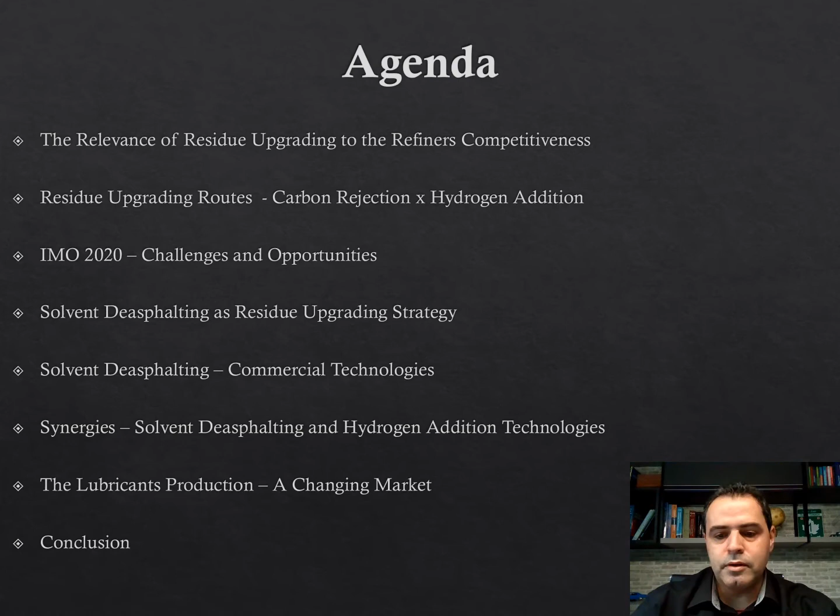The current scenario reveals the relevance of residue upgrading to refiners' competitiveness because we have stricter environmental regulations, a growing demand by petrochemicals, and falling demand by transportation fuels. These scenarios create the necessity of higher bottom of the barrel conversion capacity for refining hardware.

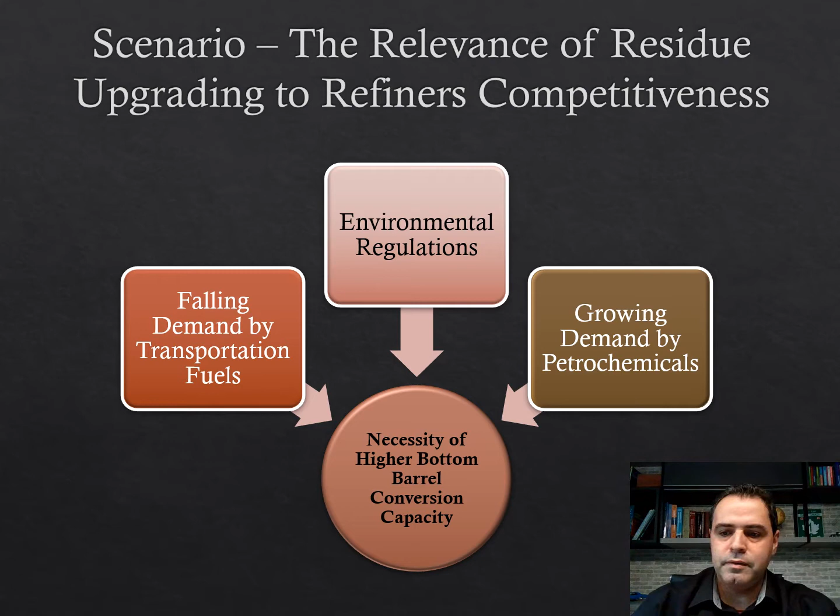For example, the growth of electric vehicles: according to IEA 2020, it's possible to see that the number of electric vehicles in circulation grew higher than 7 times in a 4 year interval. This is a strong contributor to the reduction of transportation fuels consumption.

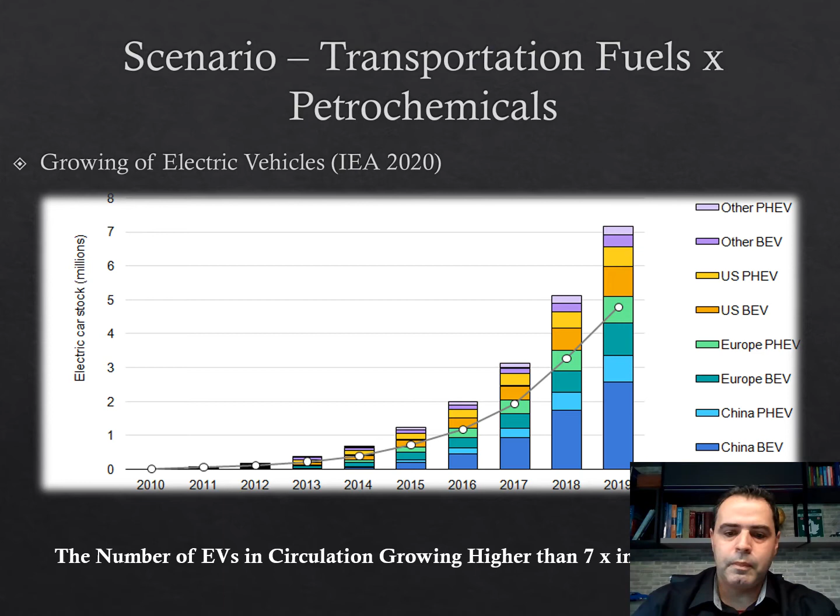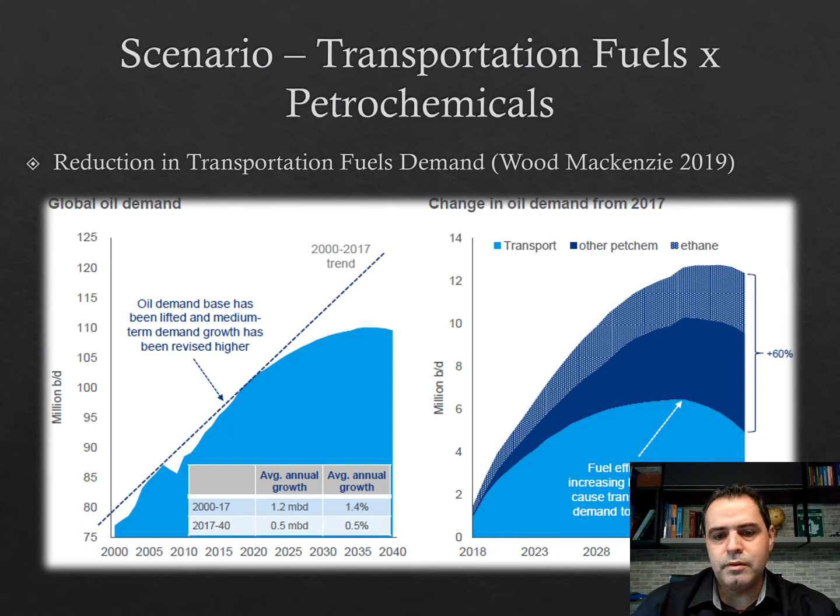Under this scenario, the reduction in transportation fuels demand, according to Wood Mackenzie in 2019, is expected alongside growing demand by petrochemicals, which will let petrochemicals account for the major part of crude oil consumption in the middle term.

Again, according to data from Deloitte, the growing market of petrochemical intermediates - ethylene, propylene, benzene, and paraxylene - means more petrochemicals implies higher bottom of the barrel conversion capacity.

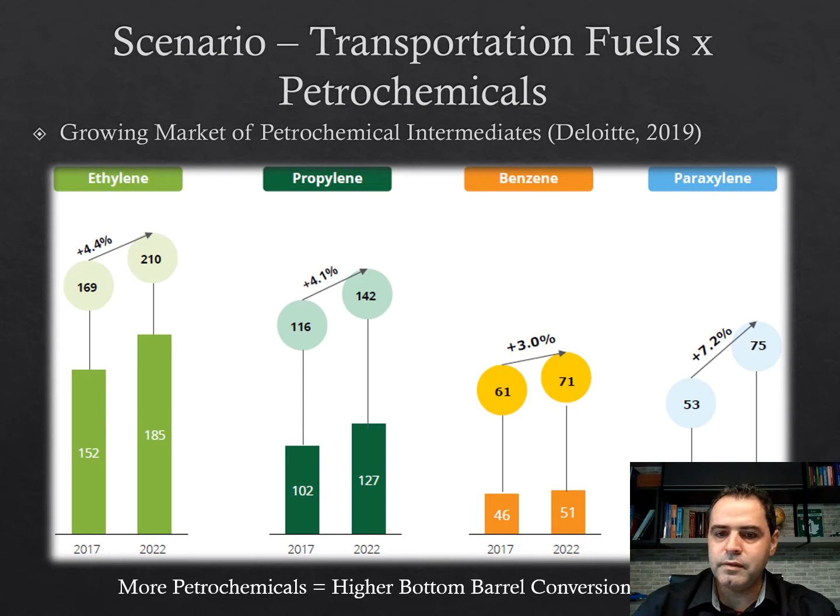The residue upgrading routes available are carbon rejection versus hydrogen addition. Carbon rejection normally involves thermal cracking processes, and we have catalytic cracking, FCC as a catalytic process, and solvent deasphalting. There's a necessity of post-treating units, normally hydro-treating units, to attend current environmental regulations. We have in the carbon rejection alternatives lower yields of high quality products depending on the crude, but lower operating and capital costs.

For the other side, hydrogen addition includes deep hydrotreating units and hydrocracking technologies. They present higher yields of high quality derivatives, but unfortunately high capital costs and high operating costs. On the other hand, these technologies are able to process high contaminant feeds, even for heavy crudes.

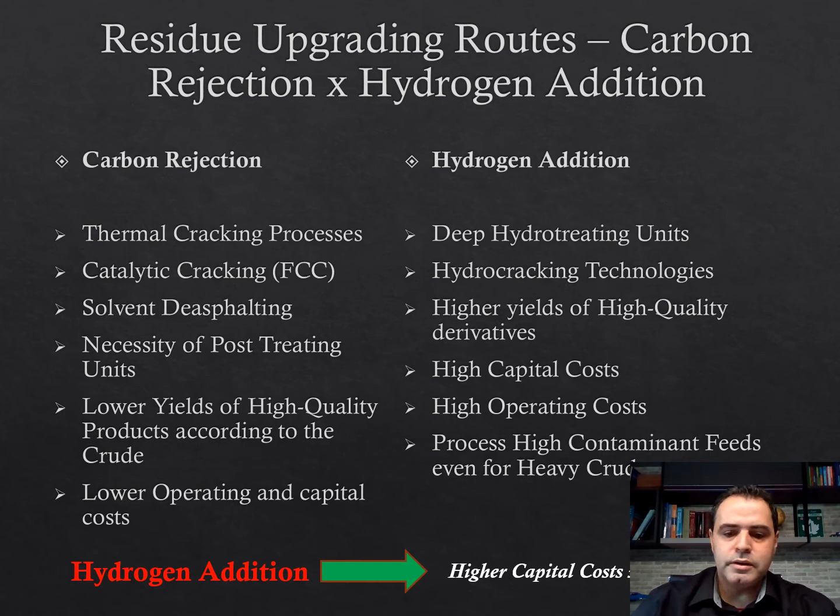Under this scenario, hydrogen addition involves a higher capital cost but with more benefits. We have some data from Shell Global Solutions, a comparative study on the relation between capital spending and residue conversion.

It's possible to see that solvent deasphalting is at an intermediate, medium capex and return on investment. So solvent deasphalting sits in the middle between higher benefit and higher capital spending.

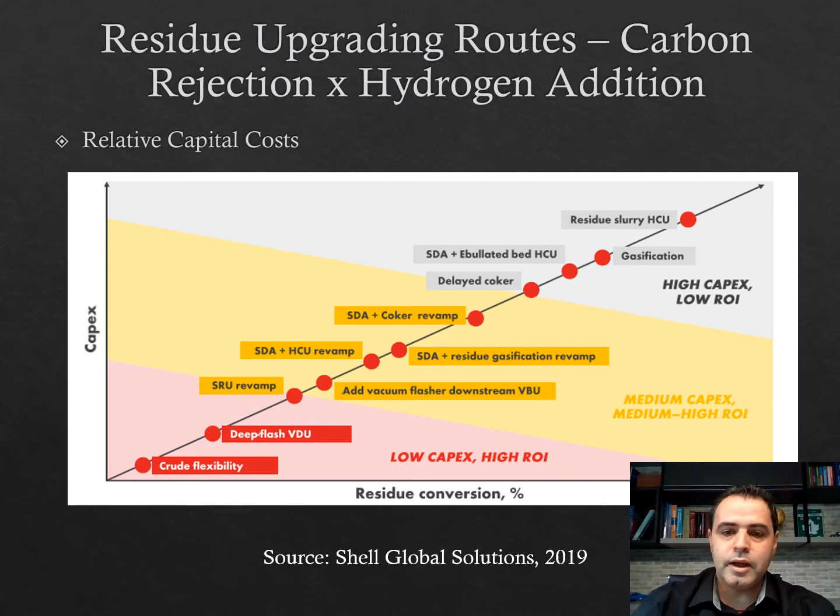The solvent deasphalting technology is based on the residue stability, which depends on the equilibrium between resin and asphaltenes. Normally the resin solvates the asphaltenes, keeping them in a dispersed phase. A solvent is used to break this equilibrium and separate the deasphalted oil from the asphaltic residue, which normally contains the major part of contaminants.

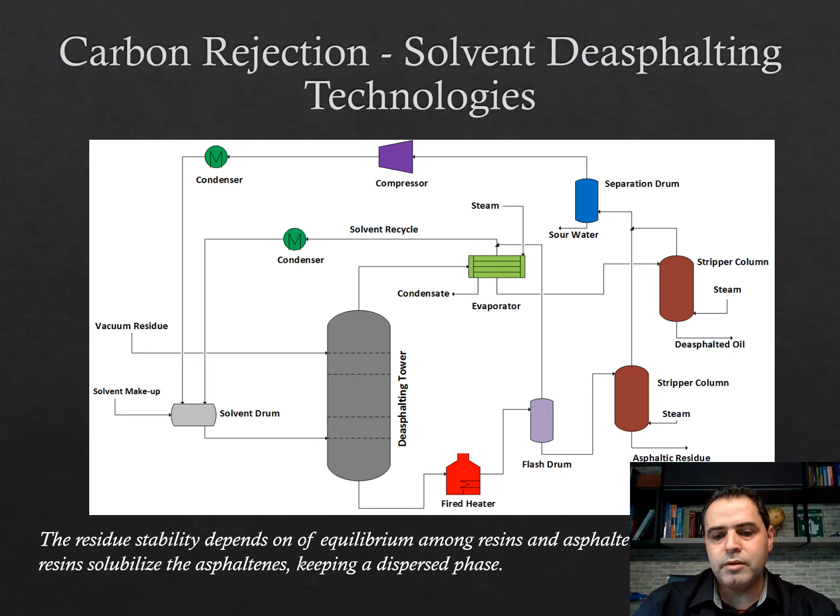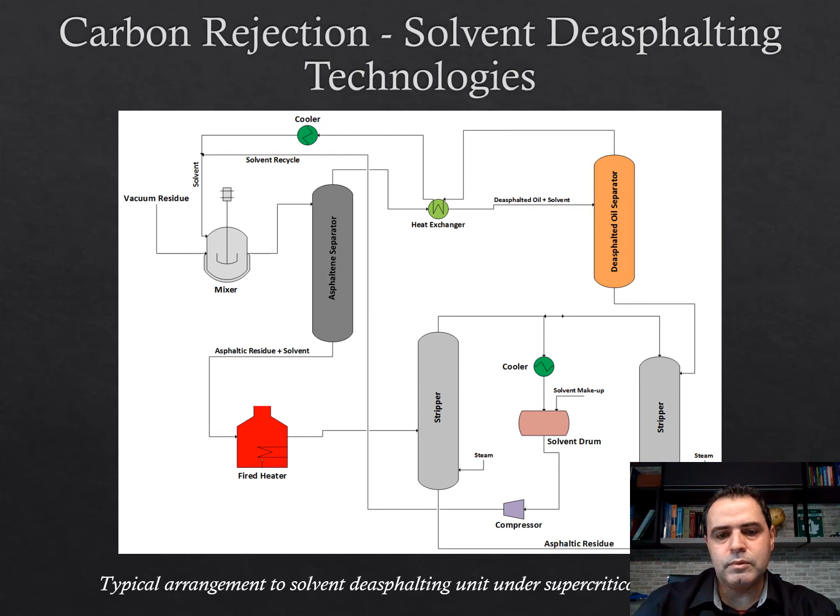Regarding the evolution of the solvent deasphalting technology, normally the most employed process is the typical arrangement of the solvent deasphalting unit under supercritical conditions. The main advantage of the supercritical solvent deasphalting technology is related to energy consumption, which is lower than conventional technologies.

This process flow diagram is a schematic diagram for the ROSE technology developed by KBR company. It's one of the most widely used technologies for solvent deasphalting, applying the solvent under supercritical conditions.

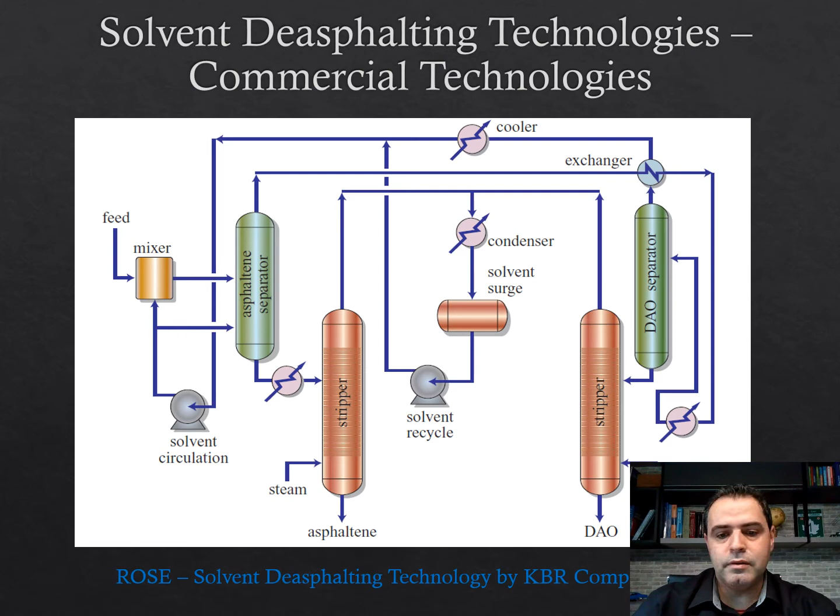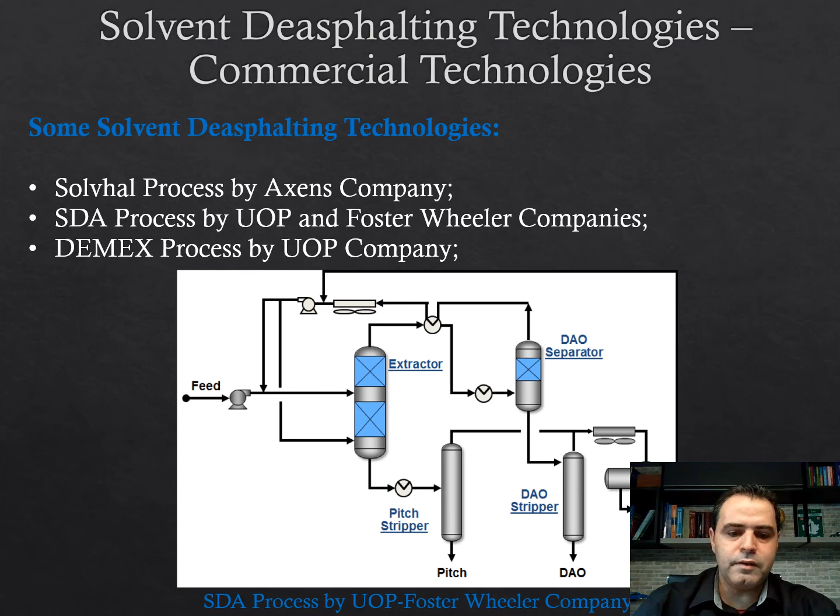Well, for example, using the hydrocracking unit, the deasphalted oil is applied to produce fuel oil in refineries processing low sulfur crudes. It's possible to produce bunker fuel in compliance with IMO 2020, and the asphaltic oil can be directed to the bunker or used as feedstock for the FCC unit, in synergy with the delayed coking streams.

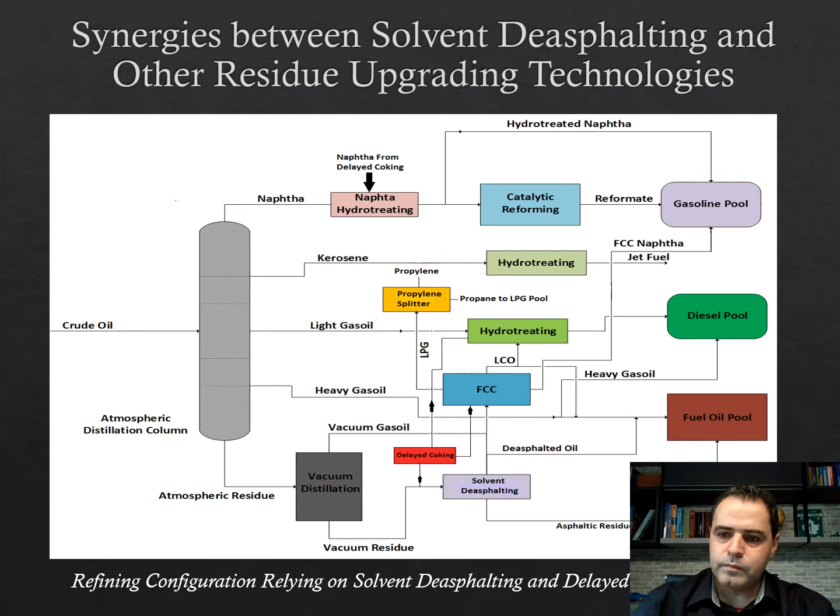Well, a known technology developed by the Chevron Lummus company is the synergy of the solvent deasphalting unit with deep hydrocracking.

This technology is called LC-Max, where the solvent deasphalting unit is applied in synergy with hydrocracking.

Normally, the deasphalted oil is supplied to the hydrocracking unit to produce middle distillates with higher quality.

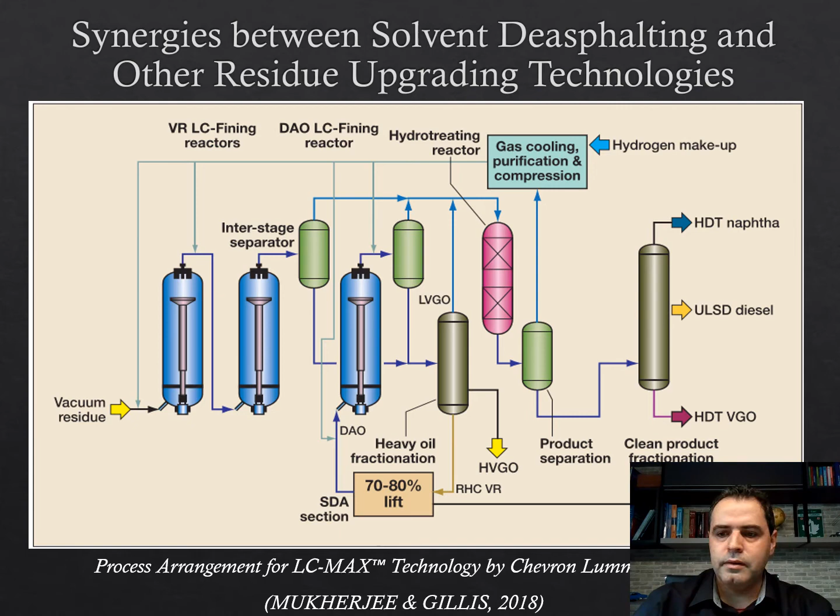Well, IMO 2020 presents a very strong challenge for some refineries, especially those processing high sulfur crudes.

After January 2020, this task became harder because of the reduction from 3.5% mass sulfur in the bunker to 0.5%. This is a drastic reduction.

So we need to control the sulfur content in these streams. The solvent deasphalting technology can be an attractive alternative for refiners processing low sulfur crudes.

With relatively low capital spending. Why? Because the solvent, normally the atmospheric residue - for example in Brazilian crude oils - has sulfur content varying from...

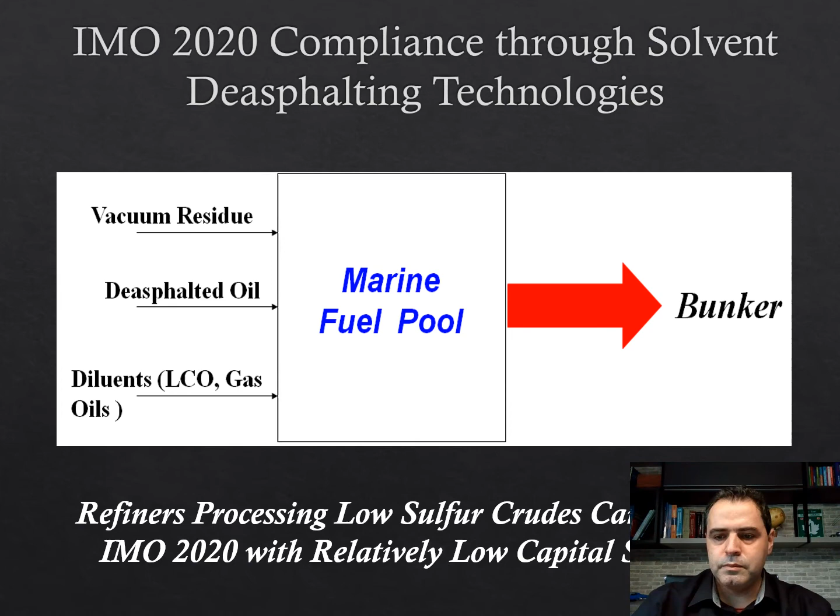We have a first column to separate the atmospheric residue, producing medium oil, light neutral oil, and spindle oil.

The bottom of this column is fed to a new column that produces heavy neutral oil, and finally the vacuum residue.

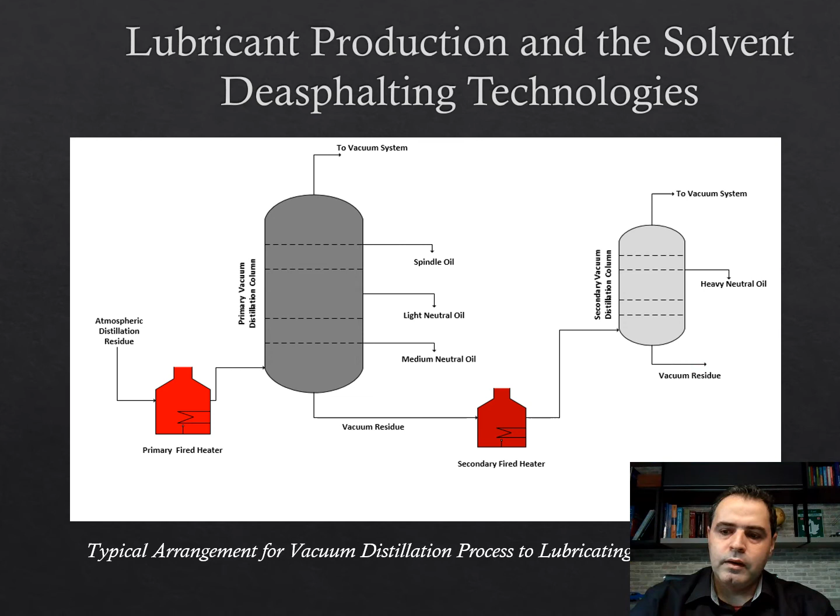We have the propane deasphalting unit - the vacuum residue is fed to the propane deasphalting, producing the heavier portion called asphalt.

The deasphalted oil is fed to the aromatic extraction section, and the raffinate oil is fed to a solvent dewaxing unit.

The dewaxed oil is normally sent to a finishing unit. It's normally involved in hydroprocessing.

From a light hydroprocessing unit to a mild hydroprocessing unit, to produce the final base lubricant, while the waxes are treated in a wax deoiling unit.

And the deoiled wax is again hydrotreated, and we can reach the wax to consumers.

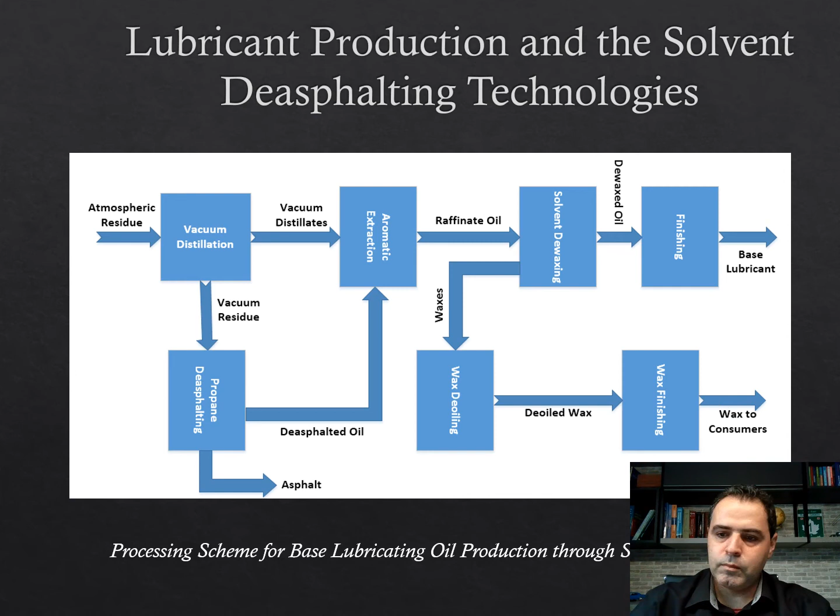The main concern for lubricant refiners relying exclusively on the solvent route to produce lubricants is the reduction of Group 1 and 2 base oils.

By 2030, for the paraffin Group 1, while paraffin Group 2 is expected to grow - but this is a trend of...

The technology development in the automotive industry is reducing the consumption of base oils from Groups 1 and 2.

This puts under pressure the refiners relying only on solvent deasphalting technologies.

So it's necessary to revamp these units, including incorporating hydrocracking or mild hydrocracking technologies.

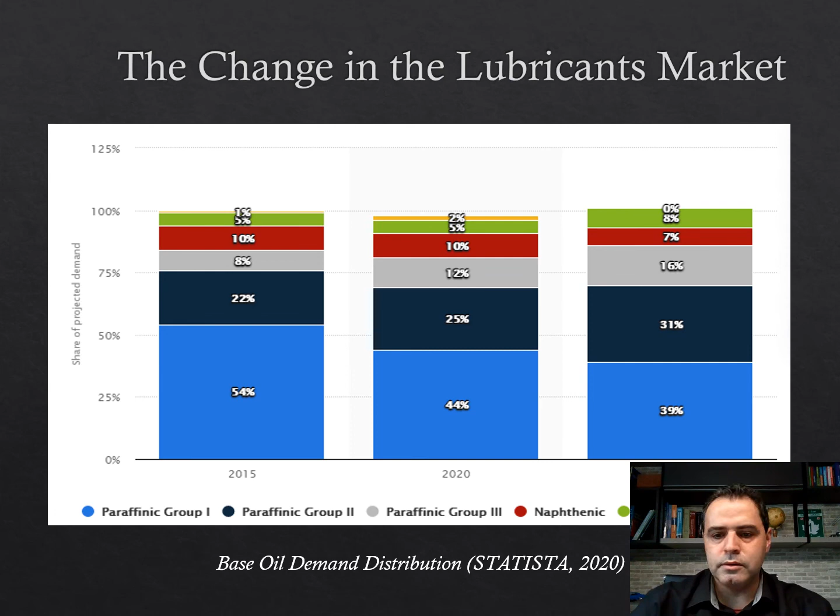Refiners relying exclusively on solvent deasphalting technology tend to lose market share in the lubricants market due to the reduction in Group 1 and 2 base oils, as quoted earlier.

The synergy of solvent deasphalting with other residue upgrading technologies like FCC and hydrocracking can ensure higher profitability and operational flexibility to refiners, especially given the current challenges faced by players in the downstream sector.

We strongly believe that the downstream of the future is based on four pillars: higher bottom of the barrel conversion,

Petrochemicals integration, clean hydrogen sources, and renewables co-processing.

So residue upgrading technologies are fundamental for refiners to achieve competitiveness in the downstream of the future.